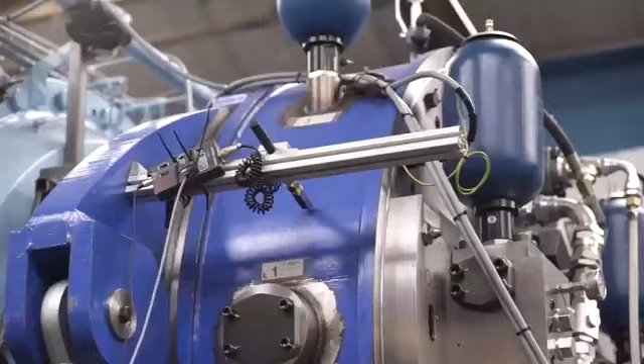Artemis Intelligent Power was a company that we spun out of the University of Edinburgh in 1994. There were a lot of renewable energy projects on the go and no realistic way of matching the movements that natural forces bring to the movement that a generator making electricity requires. Digital displacement technology replaces the conventional analog mechanisms of hydraulic machines with a completely digital control method. Each working chamber of the machine is provided with a solenoid-controlled valve, which is controlled by an embedded computer synchronized to the rotation of the shaft.

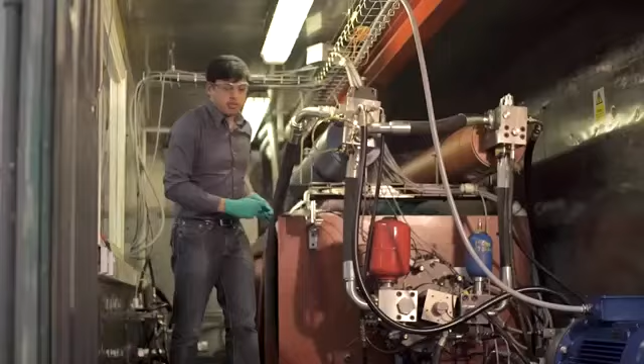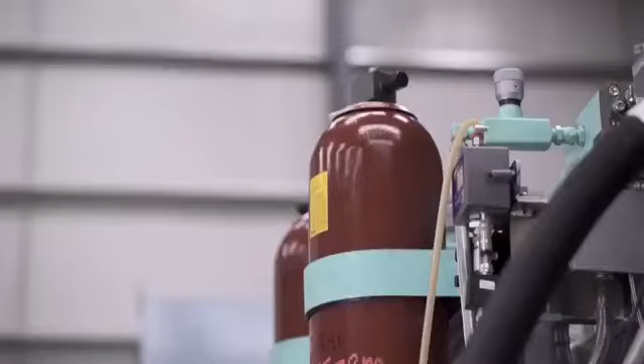Every working stroke of our machine is controlled in real time by a computer. Of course, this technology didn't exist before. It was really by making first small demonstrator machines and understanding what the technology can do that we realized how big the potential is. For the first wind applications, we wanted to do something big straight away, so we were looking at several megawatts right from the very beginning, using a ring cam pump. And you were choosing what fraction of the pumping modules you want to deliver the power.

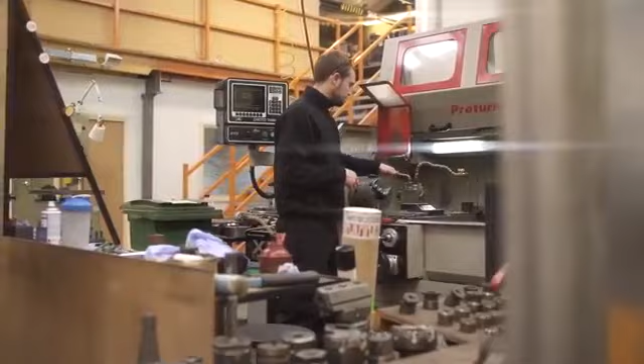So you've got variable speed input and absolutely fixed phase frequency output. One of the most impressive aspects of the technology is really the way it's designed. The 7 megawatt transmission is made of many modules of the same, say 100 kilowatt, and if anything happens to any of these modules, they can simply be disabled and everything else continues working.

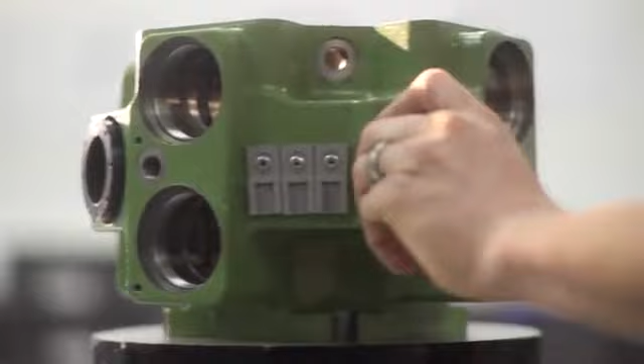I think the very exciting thing about digital displacement technology is that it can be applied to so many different markets. Apart from the environmental benefits from this technology, it brings employment. It's great in a way to see that it is possible in the UK to build a company that can develop but also manufacture and enter into world markets.

Anyone who enjoys watching diggers and bulldozers would guess that the best way to harness the hugely powerful undulations of a wave energy device, such as the duck, to the shaft of its electrical generator is by oil hydraulics. In fact, the hydraulic transmission for the duck called for a whole new generation of machines.

When he arrived in our group, Robert Clerk had already spent much of his working life developing a remarkable axial piston swash plate machine.

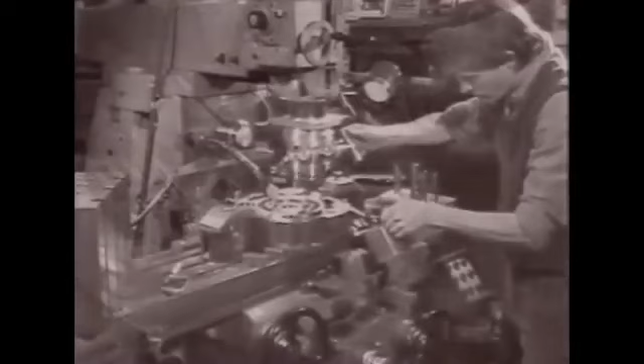In the mid-1980s, Matthew Ree and Karen Gibson worked with him to build and test a 500 kilowatt prototype. Robert was uncompromising in his pursuit of high efficiency at full and part load, and we knew that such an approach was essential if wave-generated electricity was ever to be economically produced.

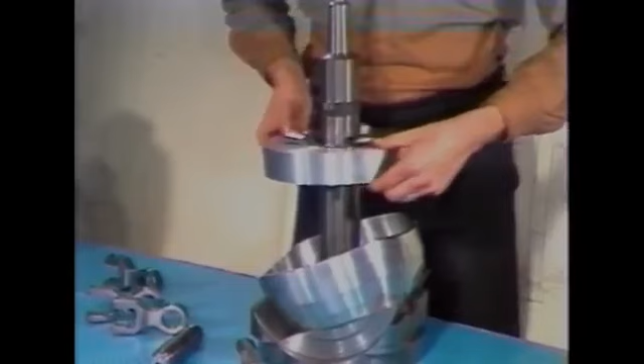The machine ran inside a dry case, and most of the bearings, including those of the swash plate, were hydrostatic. The outsides of the cylinder sleeves were pressurized to reduce piston leakage, and the tri-link connection eliminated slipper pads. The design incorporated hydraulic computing elements to optimize performance. Robert Clerk's brilliant synthesis of new ideas pushed the limits of conventional hydraulics.

Now, that really was conventional hydraulics, which is what Robert brought to us. But the other half of that power transmission contained the seeds of digital displacement, and that will follow on, I think. Should I just carry on? Yeah, carry on with that one, Stephen.

Basically, the low-speed part of what was involved with the duck was actually the precursor to digital displacement. We needed a way to have a very controllable transmission inside this wave power device. Robert, although he came and helped us develop his own pump, which was incidentally about 4 times more power dense than competing pumps at the time, also gave us the background to start on this new pump. I was involved really from the very beginning, at the age of about 23. I'll be 60 in January. It's been a long, long time.

In any case, we started working on this new kind of hydraulics that we needed to develop in order to make hydraulics efficient enough. So there's going to be a follow-on bit of video now, which takes us through the early parts. We're listening, by the way, to the voice of Jamie Taylor. Jamie was the first person I ever met in Edinburgh, and in a way belongs to the MacRobert Award as much as the other five people named. But we get his wonderful mellifluous Scottish accent taking us through this. So perhaps we can start that one.

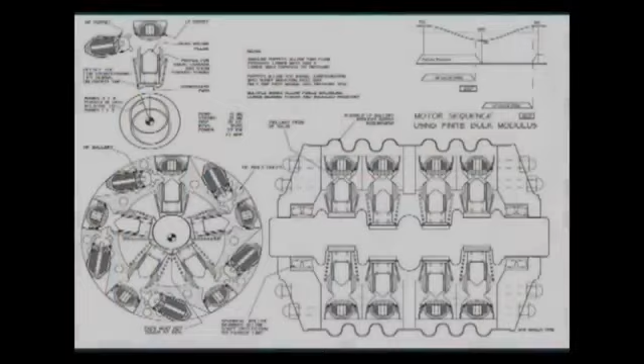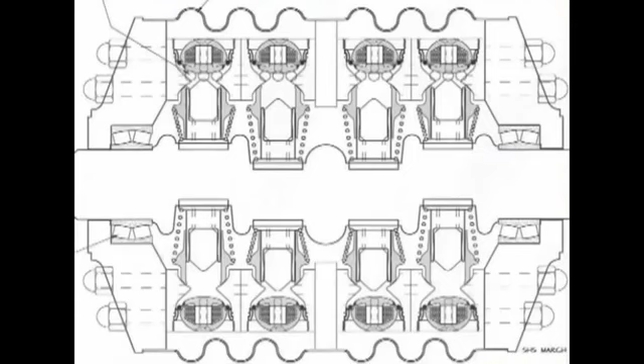To obtain the ultimate efficiency with a natural interface to electronic and computer control, Stephen Salter had already begun working with Robert, and now with Win Rampen, to develop a new technology: digital hydraulics. By using computer-triggered valves, individual cylinders of their new radial piston machine would be pressurized into circuit only when a work stroke was required. Individual units could be stacked on a common shaft to form the wedding cake machine, an energy processing system able to service many independent hydraulic circuits.

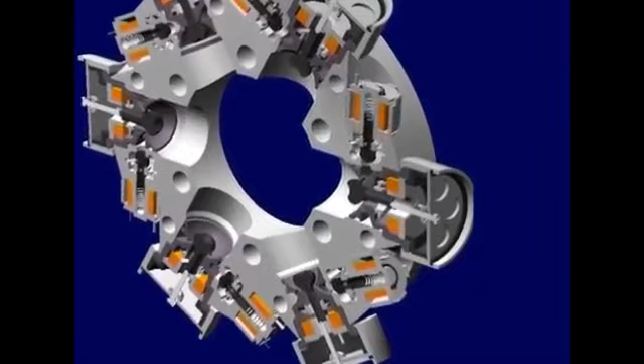This SolidWorks view shows the copper wire of the sectioned solenoid coils and the black valve poppets. Into each of the large diameter internal bores will be fitted a cylinder, like the one shown hatched in the centre of this Vascad drawing, the big end of its piston floated by hydrostatic pads over the rotor eccentric.

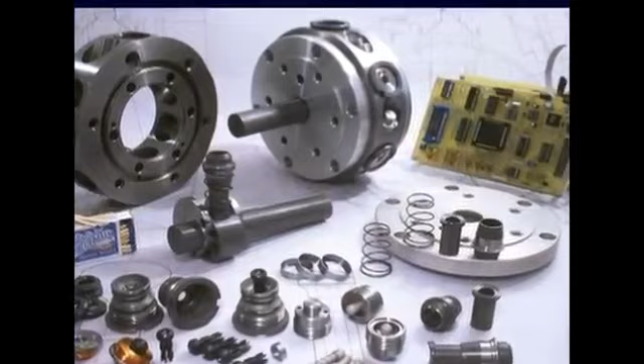The digital concept scaled easily to different sizes. The first machine was for a portable hydraulic power supply. The pump sits in the oil tank under the electric motor. Pressure and flow can be set by control knobs or by external command signals.

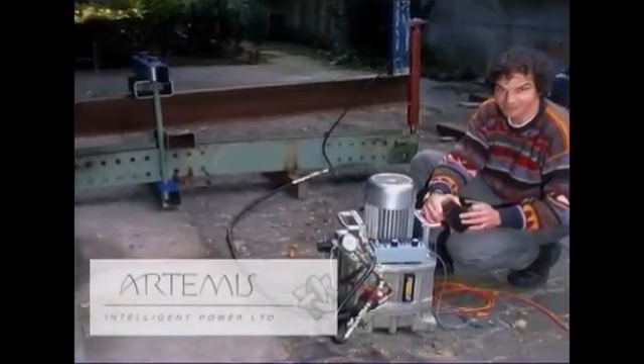This was the first machine built by Artemis Intelligent Power, set up by Win Rampen to commercialize digital hydraulics. Artemis supplied prototypes of the pump to Sauer Danfoss, world leaders in mobile hydraulics, and they continue to be involved with the work. Digital hydraulics required the evolution of a new species of poppet valve, which would rapidly change state following a current pulse in a solenoid.

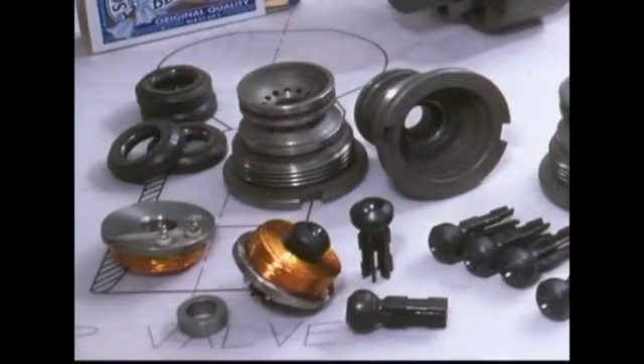We made these low-pressure poppets from a carbon-filled thermoplastic called PEEK, polyether ether ketone. We'd already tested these little sample poppets to see if PEEK was up to the job. The rotor of the test rig subjected each of them to 1 billion pressure cycles and confirmed that PEEK poppets would be dimensionally stable, fast and quiet in operation.

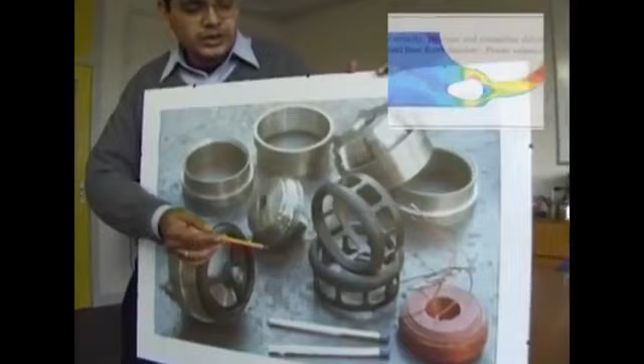When the test rig was running, our colleague Ehsan was refining the design of annular poppet valves using computational fluid dynamics. By providing an inner and an outer flow passage, annular poppets will greatly increase valve flow capacities. This will be particularly important for larger machines.

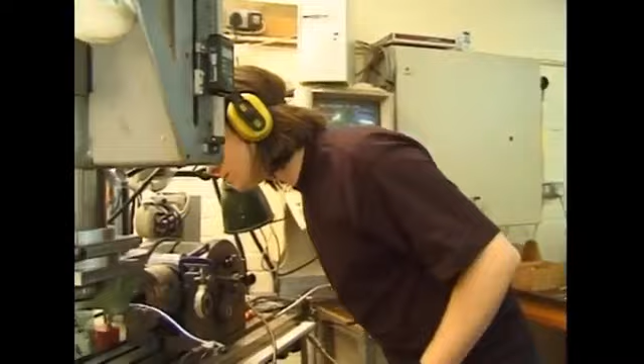Meanwhile, spherical poppets are still useful in small machines. This recent SolidWorks model is for a new low-pressure poppet. The computer also generated the codes that Neil Caldwell fed into the numerically controlled mill. Neil is working with Artemis, and for his PhD, he's building a wheel motor.

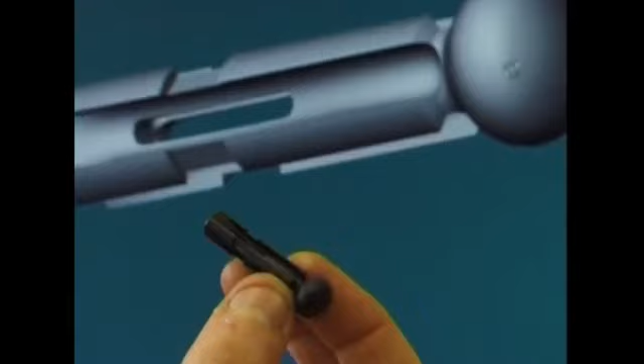Up until now, the digital hydraulic machine has operated as a pump. It is vital to extend its capability so that the same machine can also function as a motor. The first wheel motors will be fitted to a small vehicle, and the crucial test will be to generate zero-speed torque for startup.

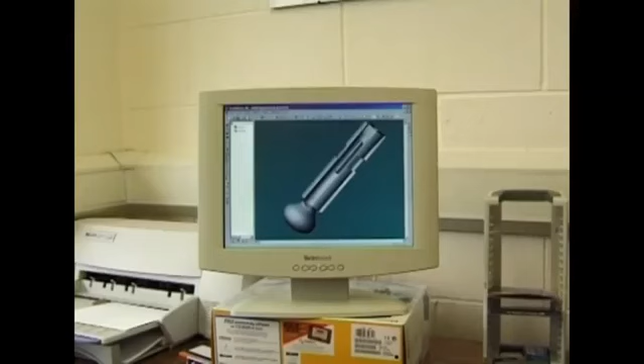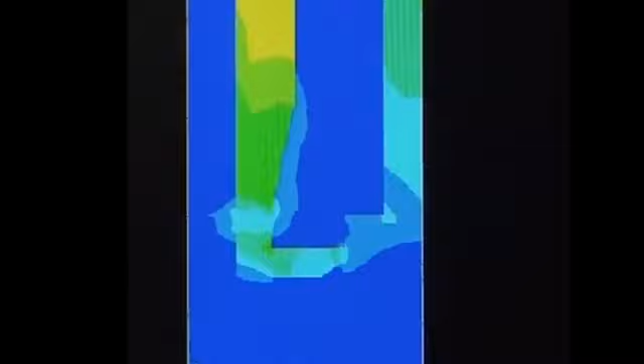Neil also spent some time redesigning the solenoid magnetic circuits using the ANSYS finite element package. The solenoids are energized by brief pulses of current, precise times when the oil forces across the poppets are near zero. Magnetic forces are generally much smaller than the working pressures of oil hydraulics, so to have authority over residual fluid pressures, the solenoids must be very well designed indeed. On the prototype wheel motor, the valves and the solenoids are in place.

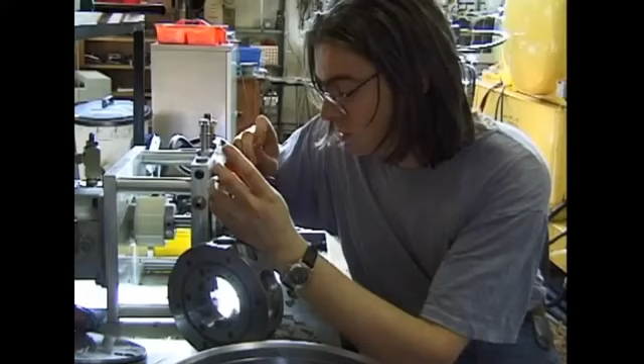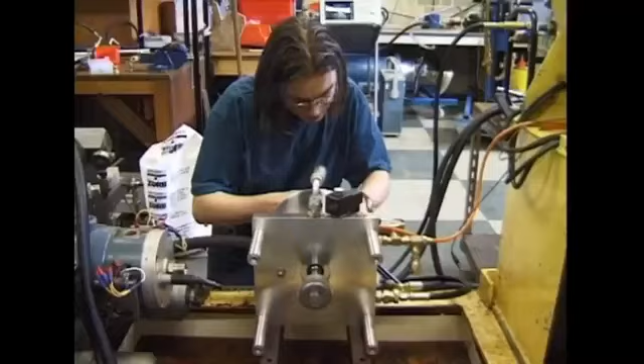The motor is enclosed in a cylindrical casing to completely immerse it in oil.

There are a lot of variables to be optimised on its control card. The valve control algorithm and timings are particularly critical for motoring.

Neil's using one of the original digital hydraulic power packs to drive the new motor. It's very handy for this kind of setup, because there aren't any throttling valves, the oil and the machines stay cool.

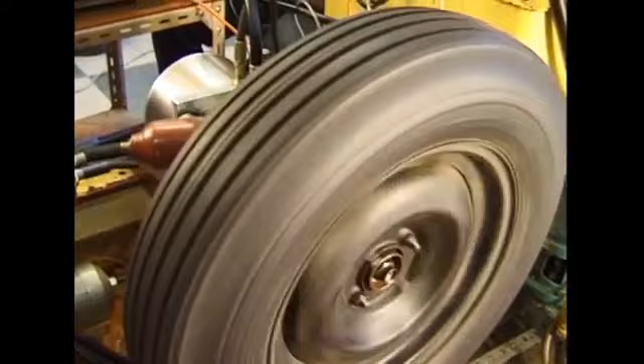The gentle chatter of poppet firing also provides a kind of intuitive diagnostic tool. To our ears, the sound is like a kind of pleasing hydraulic dialogue between machines.

The drive to develop intelligent hydraulics came from wave power research, but we now know that it will have a much wider impact. Okay, well, if we move on then, Win, what have hydrostatic drives been used for before, and how did the digital displacement that you developed differ from it? What made it better than a mechanical or a direct drive for a wind turbine?

The other point to make, the environment you see there was the wave power workshop as then, and essentially this is where Artemis was bootstrapped. It was not a salubrious environment. It wasn't an incubation centre with coffee machines and bean bags and all the other accoutrements today. It was a pretty down and dirty basement, but it had a very good machining workshop.

It had three-phase power, and it had a ready supply of students coming through the door, keen to get some practical experience. It also had a lot of skips outside because the university at that point was throwing out all the equipment from their labs which were underused because they thought in the future everyone would just be doing stuff on computers. So as they were throwing out equipment, we were raking through these skips, finding electric motors and encoders, all wonderful stuff. And so half of that stuff you see there was actually sort of built from scrap pieces.

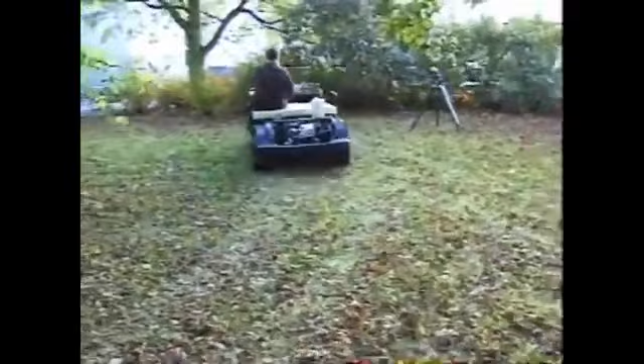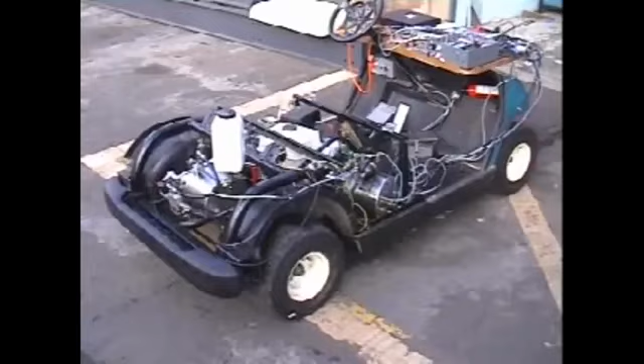So we have a pump on the engine and a motor driving the wheels. On the tray at the front, we've got essentially the electronic guts laid out so it was easy to probe and fix if something went wrong. It wasn't particularly well packaged, and certainly wasn't ready to demonstrate to CEOs of big companies. But it was a feasibility study, and it was a proof of concept.

We then refined that and simplified the system somewhat, and gave it a layer of computer control and a system controller, which allowed us to demonstrate some of the advantages for controllability. So here, for instance, I'm making the vehicle move gently. This is actually quite a challenge for hydrostatic transmissions - they often are a little bit jerky.

So I had different modes of control. We could simulate electronically the drive behavior of the competition - a conventional vehicle with a torque converter. What I'm doing here is turning this wheel, a little electronic input which allows us to essentially wind the vehicle forwards and backwards. You can imagine if you're trying to get your car into your driveway, this could be useful to position it. But you can also have serious applications, such as positioning a forklift.

That culminated in a demonstration. That is the chief executive of Sauer Danfoss, who got a ride on the golf buggy. By this time it had been cleaned up and I'd had a haircut, you notice. That demonstration was one of the pivotal points in the Artemis story, because it gave a key strategic investor the confidence to fund us through the next stage of development.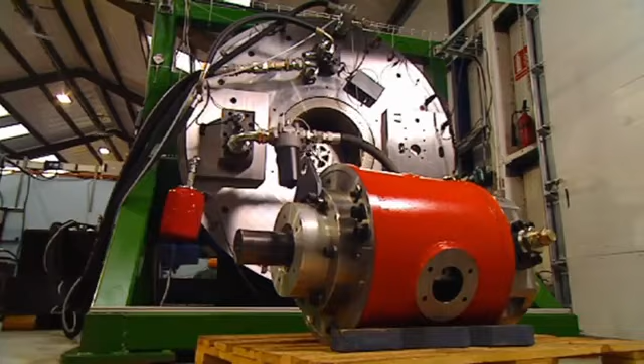It gives us much better performance because it's in the nature of a hydraulic or hydrostatic transmission to—we use the word decouple—it separates the two problems. The first problem is how you capture the most energy from the rotor as it turns. The second problem is how you turn the electrical generator at a higher speed and in the smoothest way, so you get the cleanest electricity coming out of it.

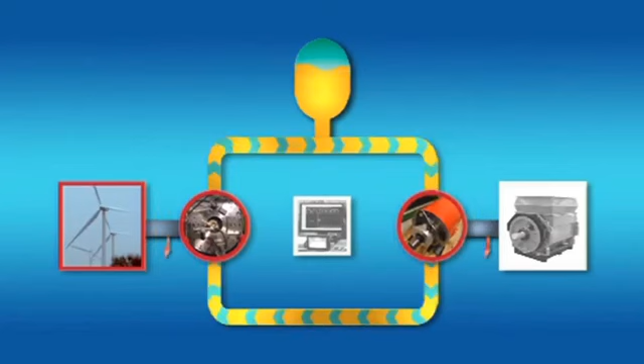The wind drives the propeller, producing torque at its shaft. This drives a pump instead of a gearbox, producing fluid power, pressure and flow in a hydraulic circuit, which in turn drives a hydraulic motor whose displacement is smaller than the pump, so it's able to drive the generator at a constant high speed. The whole system is continuously controlled and monitored by a computer.

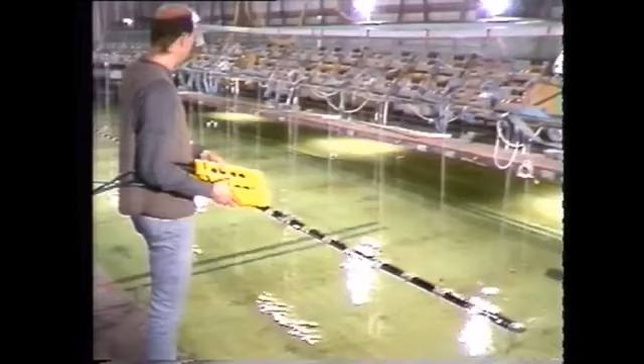Its roots came from work that we did in wave energy, starting probably in the late 70s, when we needed to find a way of conveying the energy from ocean waves—which are slow, irregular, and have very high force—to the regular rotation of an electrical generator. That, in fact, is very much parallel to what we're doing with the wind turbine.

What you have to imagine is that inside this machine there are many cylinders with pistons moving in them. As the shaft goes around, we call it a ring cam because there's actually a cam inside there. Each time the shaft goes around, each of those 68 cylinders does a pumping stroke. With digital displacement, we can decide just when the pumping stroke is about to start pumping—we can say, well, do we actually want this to pump, or is it needed?

Maybe we're working way down at part load, at 10% of the full rating. If that's the case, the computer will automatically disable that cylinder by controlling the valve at just the right moment, returning the flow of oil back to the low pressure reservoir. We call that idling, and that's a key part of it because a cylinder that's idling has very low losses indeed.

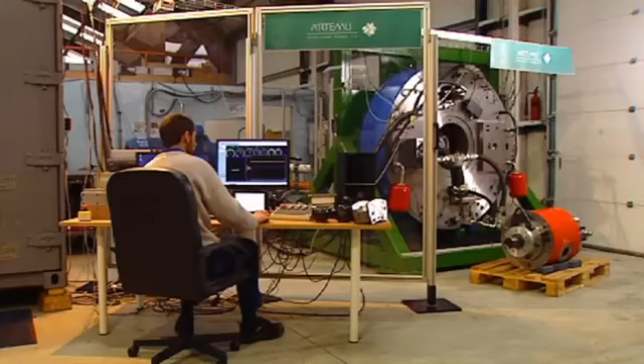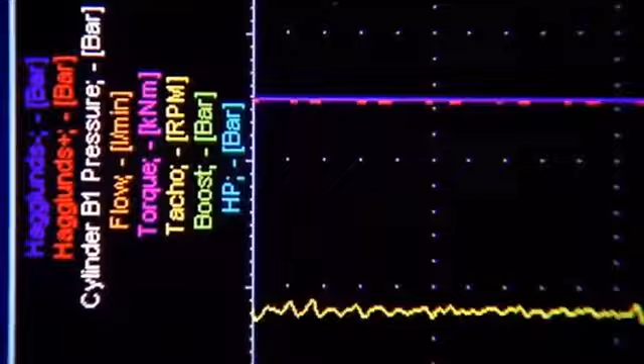That's a major contribution to the much higher part load efficiency. We're releasing the part of the machine you aren't needing at any one time, in a way that it's not costing you much in terms of ongoing power consumption, whereas conventional hydraulics are spectacularly poor on that front, which is one reason they haven't taken over all the applications they could have.

This is a very large hydraulic motor, digital displacement. The idea is to have one of these pumps driven by the wind turbine rotor, driving two of these. Maybe the wind speed is only 6 or 7 meters per second, which is quite low for a wind turbine. We can turn one of these off, so we only have one generator, and that immediately reduces the losses even further.

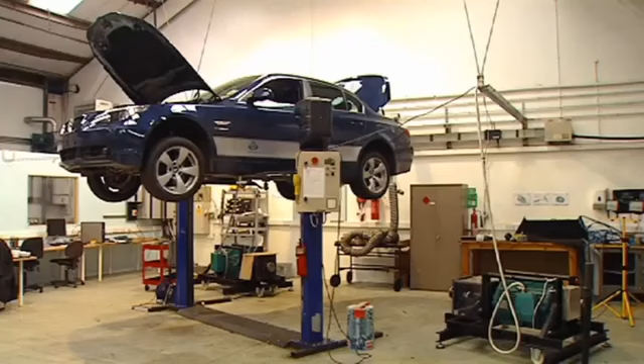It could, in principle, be applied anywhere you want to transmit shaft power, so we see there are many applications beyond the wind turbine. These include harnessing wave power, and Artemis has developed a car where the gearbox has been replaced with a hydraulic pump, which via pipes drives two independent hydraulic motors. It's shown around 50% savings in some circumstances.

With this Carbon Trust funded program, we've been able to go from a paper study—which people believed, industry being able to believe in, but couldn't really pick up from—to a real hardware demonstrator. This has really shown the benefits of the investment and the grant from the Carbon Trust, to be able to actually build a massive physical asset to demonstrate the technology and set you on the road.

So, given that you got to the 1.6 megawatt turbine, MHI were obviously seriously interested in what you guys were up to. So, I think Neil, you're going to take over the story from there, are you?

Yeah, so we were looking for a strategic investor, and at that point Mitsubishi Heavy Industries was also trying to work out what to do next for their journey in wind power. They were looking for a technology which was scalable, which also played to their strengths, and which gave them a unique position in the market. In order to get to that point, we had to make a demonstration to them, and that Carbon Trust funding really set us on that trajectory.

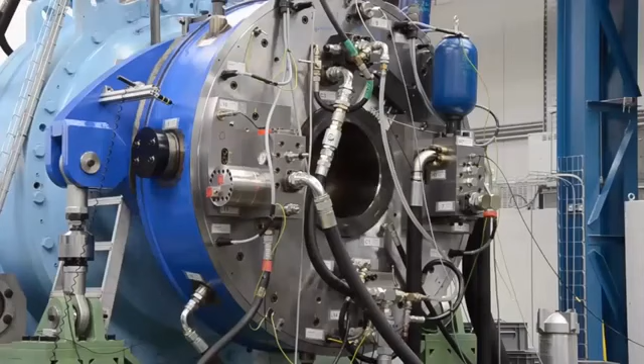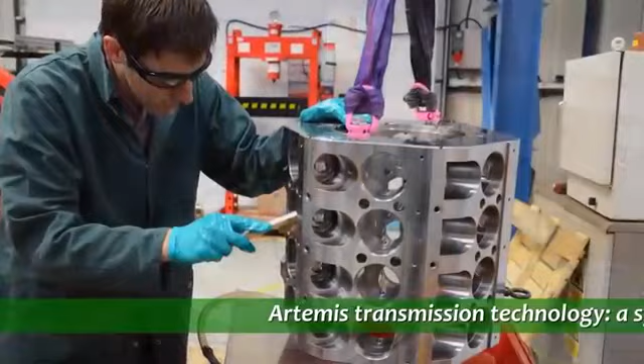Really around that—if we move on to the next video, we can have a look at the so-called Windrig 1. This was at the scale of 1.6 megawatt. After the acquisition by Mitsubishi, we built this into a complete system demonstrator, to show the efficiency, the controllability, the reliability at a scale which made sense and which could convince them to take the next level to scale it up yet further.

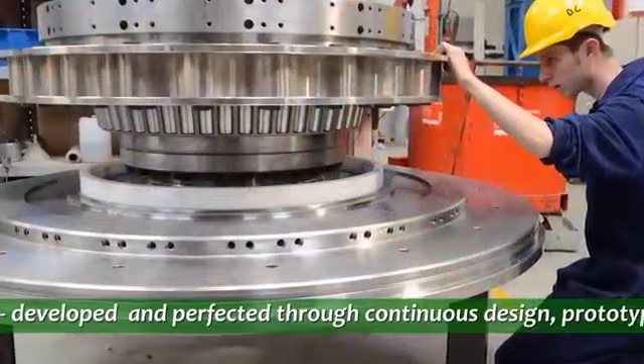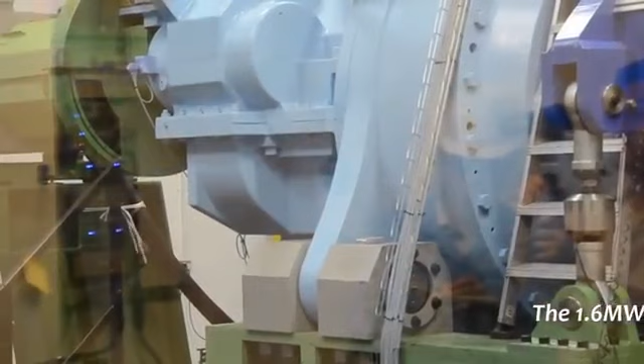You see some of the machines that we built in-house, and of course we're building the machines, we're building the electronics, we're also building the systems to test them. You can see the importance of the craft skills at the heart of it—like any machine, they can fail because of the smallest detail, the smallest quality issues. So it really is so important to getting to this point.

This test rig was quite a scary thing to operate, and there was a lot of pressure on it. We had teams of Mitsubishi engineers watching what we were doing, because of course they were going to make some very important decisions based on these test results. So this was another important milestone in our evolution towards the 7 megawatt goal.

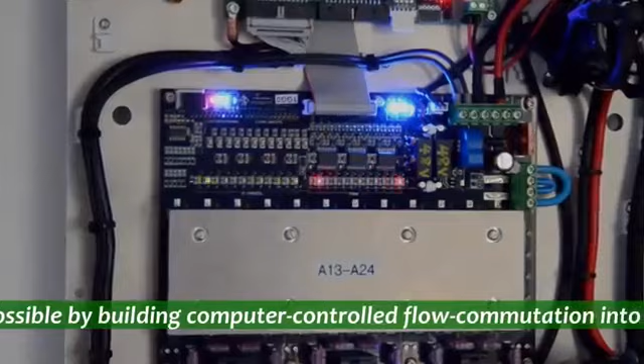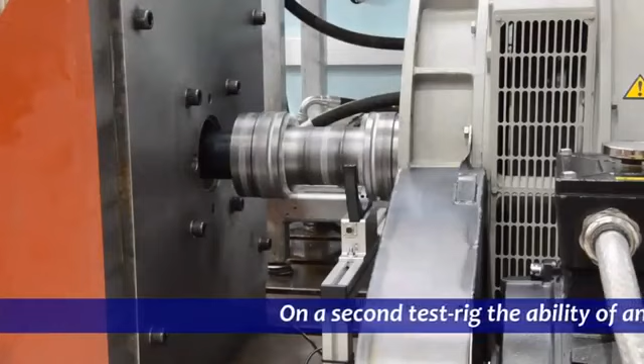You can see on the wall there the electronics firing the valves. Each one of these little pulses represents one valve firing decision by the controller, and that's the hydraulic dialogue between the pump and the motor going on here in the controllers. What we're doing next is demonstrating the other side of the transmission, which is connecting to the electricity network through a synchronous generator.

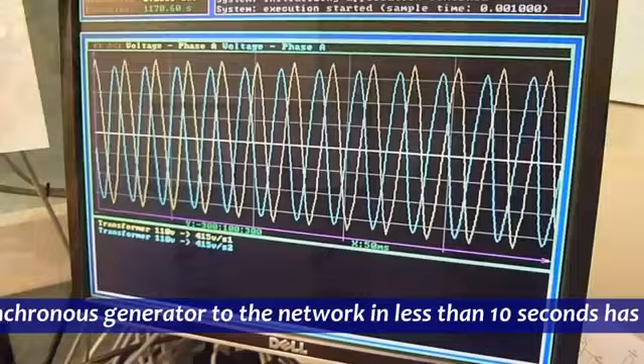It was very important to get the speed of the generator up and achieve synchronization as quickly as possible. So here we're accelerating and bringing the voltage into synchronicity in about 10 seconds, which is much faster than any conventional technology could do.

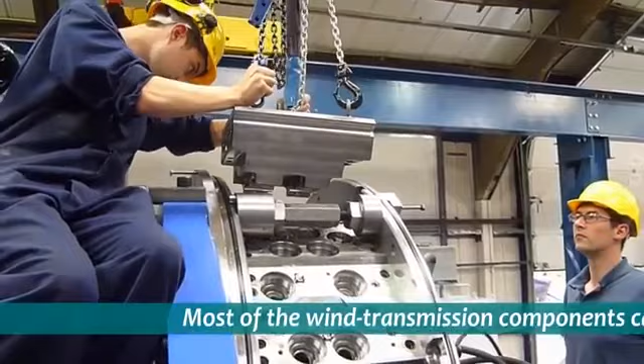That piece of work was done by a summer student who then went on to win an award as Student of the Year and also get his name on the patent. It's the type of experience students can have when they hit a really fast-moving development. You can also see some of the modules being replaced, which shows some of those benefits too.

So we could maybe move on now to show the next piece of video, which is showing what we did with Mitsubishi.

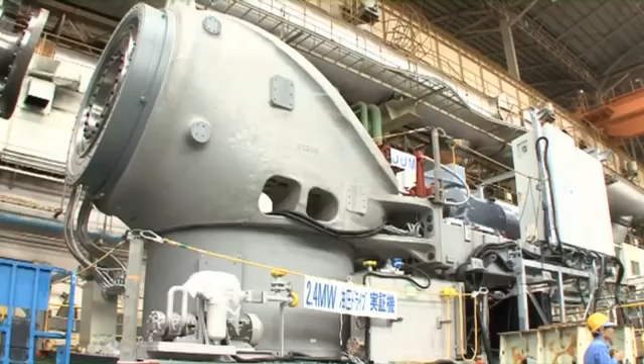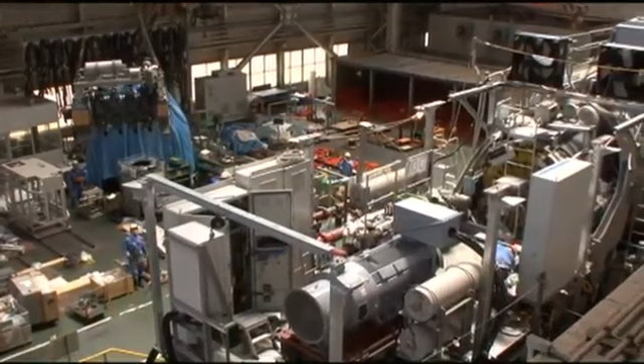Once the 1.6 megawatt had been demonstrated, we then had to scale it up to put it into a working wind turbine, because there were still risks around what happens when you actually connect it to the wind turbine, and how that whole system behaves in all the different operating conditions a wind turbine has to handle. So you can see here the scale is moving up.

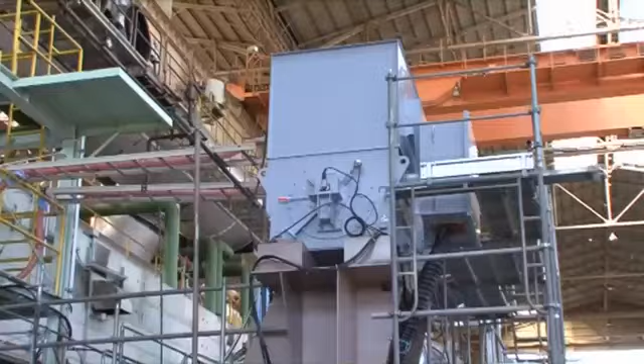It certainly wasn't a manageable scale for Artemis. There was no way we could have handled this type of project, whereas this is exactly what Mitsubishi is so good at in this type of heavy engineering.

So this type of testing was still working at the prototype level. These were still one-off machines, but of course one-off machines with, by now, a huge value. And as the money increases, so does the stress, or another way of putting it, the excitement.

The atmosphere in these control rooms was sometimes pretty tense. It felt a bit like a rocket launch sometimes when we were gearing up to do the next power level up, so I will always remember that experience, that's for sure.

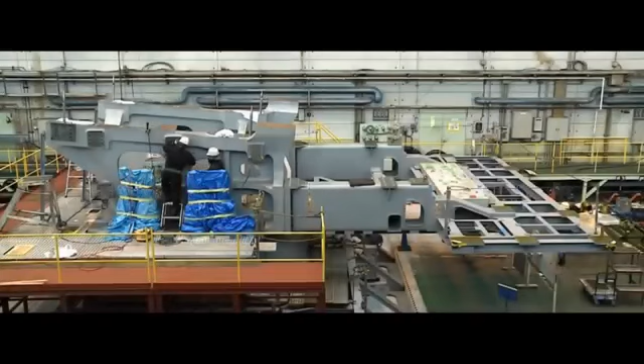So we can carry on our story and scaling up. Once we'd done the wind turbine at the 2.4 scale, which was a resounding success, Mitsubishi committed to designing a 7 megawatt system, which we did as a cooperation.

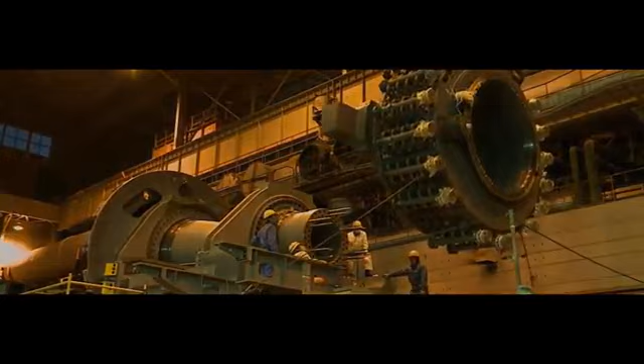But once it came to actually building the hardware, this capability is just incredible. Just the size of the cranes needed to move this stuff about are actually quite thin on the ground, these cranes. And the ability to have an integrated system with this weight of equipment assembled by a team of literally, at some points, hundreds, was quite awe-inspiring to behold.

I remember turning up to help commission the system and just looking up at it and realizing it was the size of a 3-story house, and it contained equipment that we had only dreamed of a few years ago.

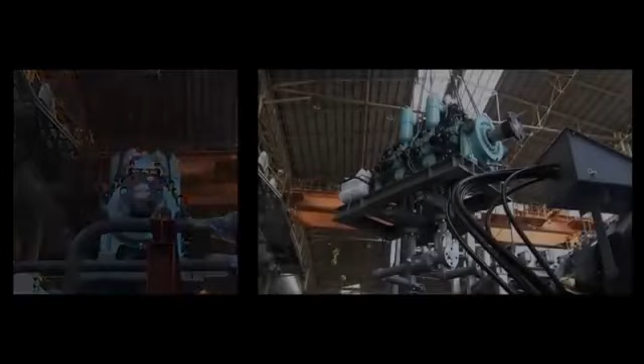So this is the digital motor being craned into position in the 7 megawatt, and you can see a view from the front of the pump and the shaft.

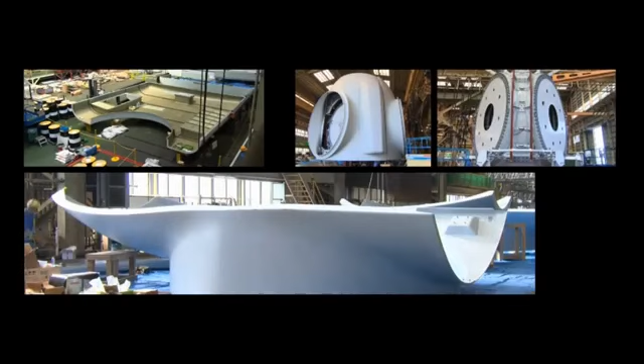Then, of course, it wasn't just a prototype transmission. It was a complete wind turbine that involved the hub, the nacelle, the tower, and the blades, and all of that had to be developed by Mitsubishi as well. So it's a much bigger project even than the new transmission.

We're going to carry on the story now to getting up to date and see how that nacelle, which is the main working part, was actually turned into a working wind turbine at Hunterston, the west coast of Scotland. This is a facility operated by SSE, and this build was actually groundbreaking in many ways.

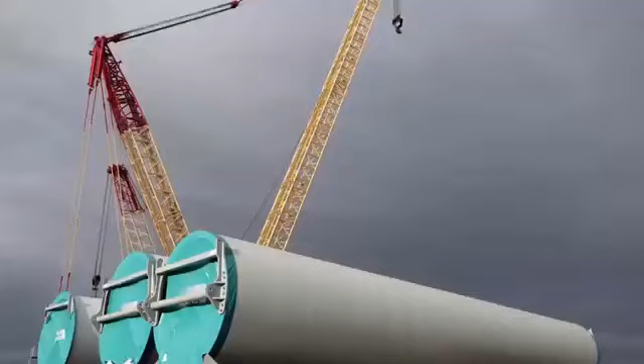Just the crane operations broke UK records for the weight and height of the equipment that was lifted. And you can see some of the logistics involved.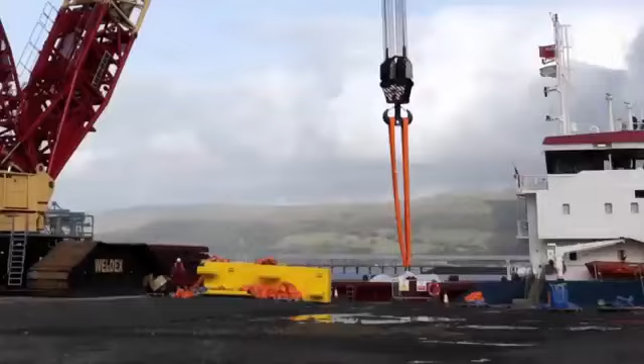These parts had to be taken over in a barge, and one of my favourite parts of this is when the weight comes off, you can see the boat lifting up.

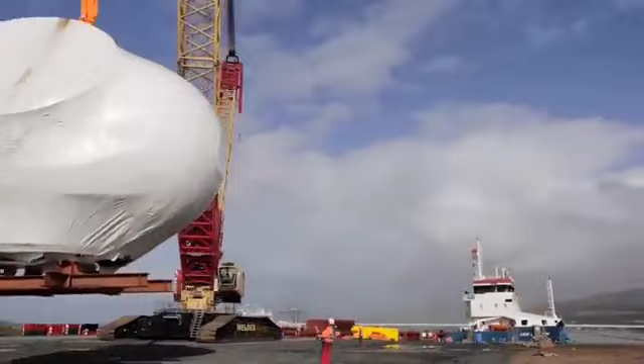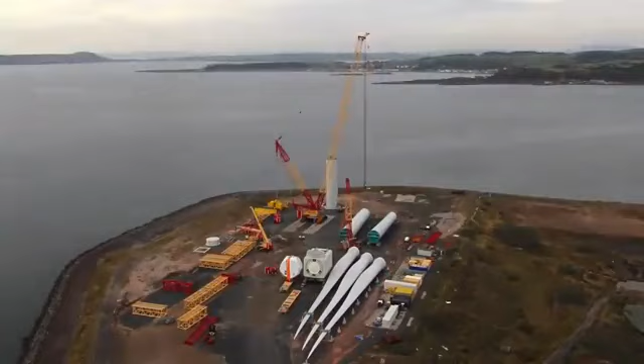This type of coordinated ballet — at Artemis, we were just watching from the sidelines. In fact, we had a video monitor in our office, and we could see it from Edinburgh, and we were just watching in awe as this ballet of assembly took place in front of our eyes, with this beautiful backdrop of the west coast of Scotland as well.

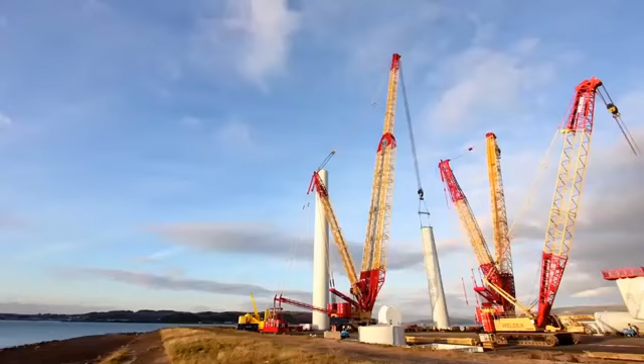It's easy to lose track of the scale, but when you see the size of the people, let alone the aerial work platforms scurrying about, you get an impression. The overall diameter of the turbine is 167 meters.

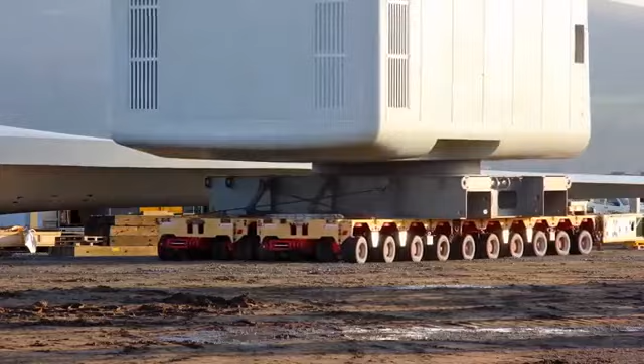That's a rival turbine behind it, by the way. It's only 6 megawatts, so it's smaller.

So this was essentially the record-breaking lift that led to it finally getting its nacelle put on top of the tower. Of course, the wind turbine assembly is such a complex operation. Everything has to be planned down to the last minute, and it's really an area where we had to step back for obvious health and safety issues, and everything had to be planned down to the last element.

Here the blades are going on. They're using something called the blade dragon, a special clamp to position the blades at just the right angle. And this goes on like that. You can see this video's been sped up somewhat.

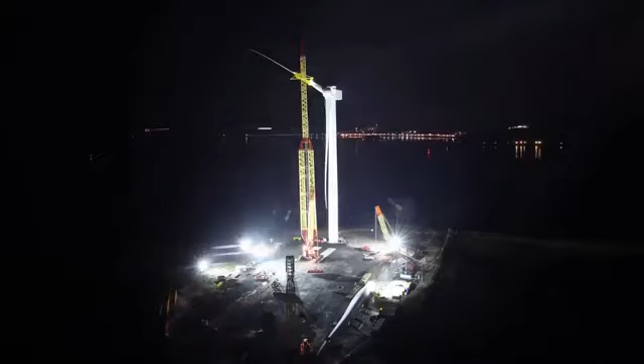And all done within a weather window, presumably. All done within a weather window, that's a very good point. Our Japanese colleagues can be somewhat superstitious about that, and one of them is convinced he's the stormy guy, because whenever he turns up, it gets stormy. So he's got that reputation.

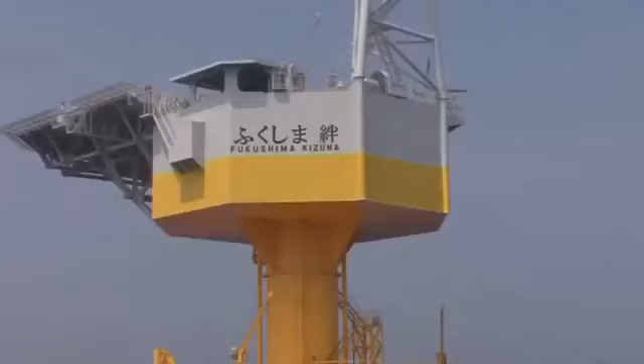So finally, it's been assembled and commissioned and it's working well, doing exactly what it was expected to do. And it's led to the next stage, the world's largest floating offshore wind turbine, positioned in the Pacific off Fukushima, and now commissioned. It's working, just about to be connected to the grid, and is a hugely high-profile project within Japan, a symbol of Japan's step towards renewable energy.

So a tremendous success story, Neil, of which you must be very proud. But you employ 50 plus people, and at the time of the acquisition many of them would have had shares in Artemis, because that's the way you ran it. Since the company's still there and you're still here, you clearly didn't all clear off to the beach in the Caribbean. But what difference did it make to them, and what difference has Mitsubishi's ownership meant to you as a company? I think maybe Win should talk about the shares, because it was really one of his ideas.

At the beginning, we decided we couldn't pay massive salaries to our young employees. To attract people of quality like Neil and others who came aboard, we thought giving people some ownership in the company would be appropriate. As it turned out, that was a very good thing to do. Even a very small share ownership really motivated people to take part in the company and take ownership of problems as they arose, and really helped us all row in the same direction when things got tough. I think that would be my advice to anybody starting a small company, that they should think of doing the same thing.

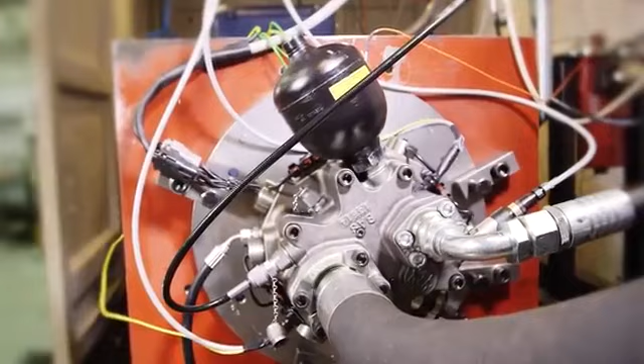Artemis is an engineering company. It's a research and development company, and we're developing a strange and exciting kind of hydraulic transmission technology. It's a team of young engineers that believe in the technology and that want to bring it to the market. Artemis is a spin-out company. It came out of the University of Edinburgh, and it came out of one of the hardest problems of all in engineering.

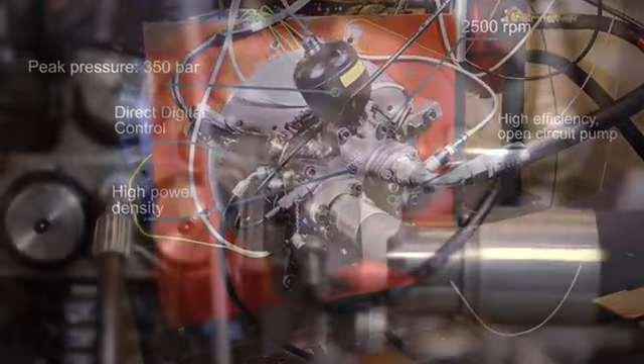Digital displacement technology is a new type of hydraulic machine. We have combined the very robust aspects of hydraulic machines with modern control technology. Each piston is individually controlled with a solenoid-operated valve, which is controlled by the microprocessor. This allows us not only to get very fast response and accurate control over the machine, but also allows us to achieve very good efficiencies.

We're developing it as both an OEM and a retrofit project. Throughout the project, we were considering the ease of installation as quite a high priority, so it's very straightforward to install and doesn't require a huge amount of skill in terms of the operator.

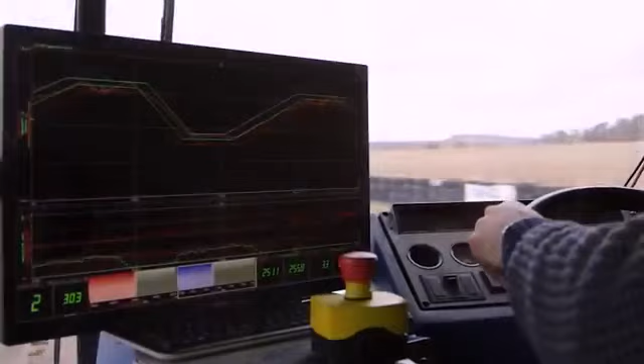So for any hybrid technology to be adopted by the main market, it's very important that we can create payback on the fuel saving on its own. This system has the potential to save around 20% of the fuel, and because of this very low cost that's possible for the system, we can achieve payback times well within the periods that operators would expect, typically 2 to 4 years.

Where the challenges of storing kinetic energy are so extreme.

No, that's great. So, I mean, hopefully we'll have given you a bit of a taste there for the things that are still in the pipeline for Artemis to continue to grow success. Before coming back into the audience, I've just got something I want to explore with you about skills base and the STEM initiatives, the way to encourage young people into engineering.

Of course, the Academy's got a number of programs where it's trying very hard on a national basis to try and raise the image of engineering, completely change public perception, following its Universe of Engineering report, and also to work with the other professional institutions in doing things. What's your experience in Edinburgh and elsewhere about the attraction of engineering and the sort of work that you do to the young people that you come across?